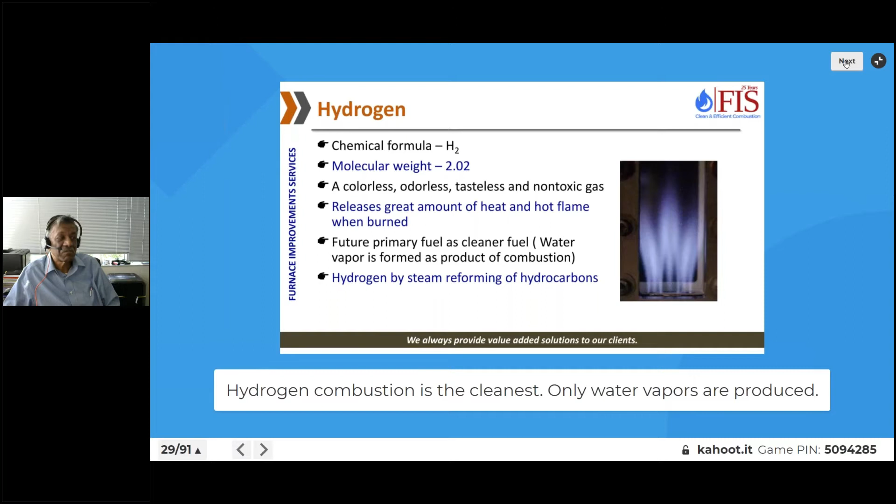Hydrogen is very light. Molecular weight is only 2. Colorless, odorless, tasteless, non-toxic gas. I think it's a very, very fun fuel. Releases great amount of heat, hot flames, future fuel. The only product of combustion is water vapor, and steam reforming is one of the major ways in which we are generating hydrogen. So very, very important.

And here I can show you how the hydrogen demand has gone up in the last 40 years. We are almost at 4 times. Every 10 years, the demand is doubling, actually, you can see. And there are 2 major users. We have ammonia and we have refining. If you see the chart, you will see basically the 2 major users. Others are very, very minor.

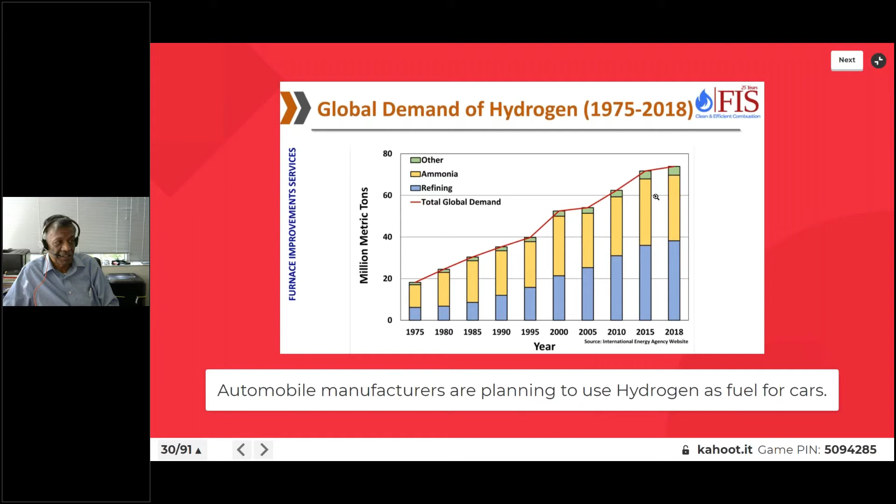So let us talk about the furnaces now, or the SMR, steam methane reformer. We have been talking about end products, and the purpose of steam reforming is to convert hydrocarbon feed into hydrogen-rich synthesis gas. It's carried out in a direct fired catalytic reactor in the presence of steam. So we need to understand what process is taking place. So we will talk about the chemistry of steam methane reforming, catalyst, steam to carbon ratio, operating conditions, and design parameters.

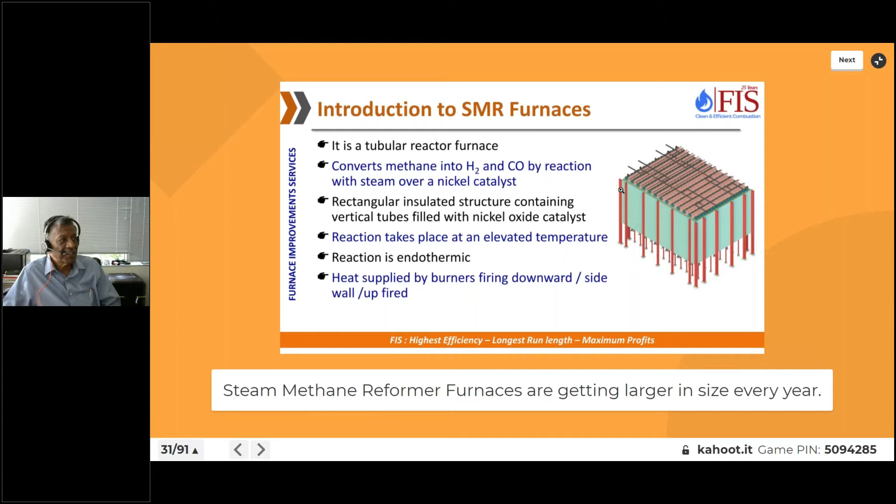So in most of the furnaces, we are heating. We are just doing sensible heating, or we are doing vaporization. But this is a reaction furnace. What goes in doesn't come out. So we are feeding steam and we are feeding methane, but what comes out is hydrogen, carbon monoxide, carbon dioxide, and unreacted methane. This reaction is endothermic. It takes place at high temperatures, and the heat is provided by burners firing downward, sidewall, or upward, depending on the design. So this is basically the steam methane reforming furnace.

So typical flow is we take the hydrocarbon feed, preheat it in the convection section, then we do the purification. We'll talk about it, but we need to purify and remove all the sulfur, almost down to 0.2 parts per billion, because sulfur is a poison for the nickel catalyst. So we remove this, then we mix steam, again preheat it, and then send it into these tubular reactors, where we are providing heat for the endothermic reaction.

And then, of course, we generate steam at the outlet to recover the heat. That's basically the typical flow scheme. And the flue gases are cooled down and then vented to the stack. It appears that in future we may not be able to even vent it to the stack. We may be recovering CO2 from these flue gases and sending only the rest, oxygen, nitrogen, and water vapors, into the stack. And the CO2 will be sent to the pipeline. So that is the future of flue gases as I see it in the next 15, 20 years.

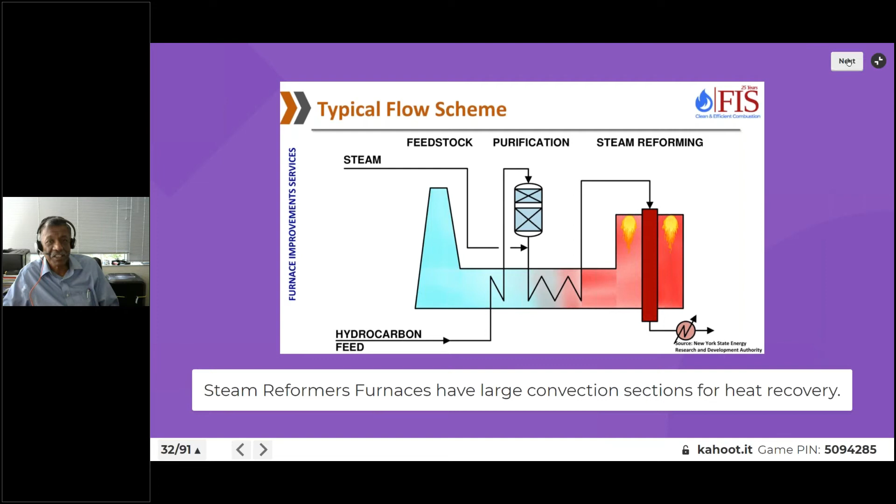So one of the parameters we want to talk about is what is steam to carbon ratio? What does it define? Is it weight of steam to weight of carbon, weight of steam to weight of hydrocarbon, moles of steam to moles of hydrocarbon, or moles of steam to moles of carbon? So most of you got it right, actually. Steam to carbon ratio is defined as moles of steam to moles of carbon in the feed. That's basically what steam to carbon ratio means.

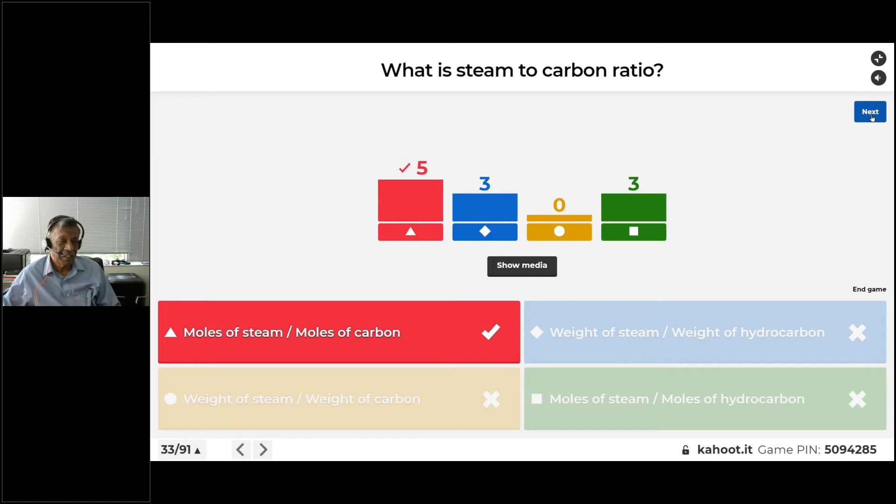And let's go over and ask you a couple more questions. So we have a reaction given over here, which is methane plus water produces carbon monoxide and 3 molecules of hydrogen, CH4 + H2O → CO + 3H2. It's an endothermic reaction requiring almost 97,000 BTUs per pound mole. So I'm asking you, what is the steam to carbon mole ratio in the reaction we just talked about?

So almost everybody got it correct. It is 1. So if you look at the equation, we have 1 mole of methane, and that 1 mole of methane has only 1 mole of carbon, and then 1 mole of water, which is 1 mole of steam. So the ratio is 1:1. So if you think about this reaction, the basic reaction which is taking place, theoretically, the steam to carbon ratio needed is only 1.

But what happens is there is another reaction which is taking place, which is called the water gas shift reaction. And if we combine that reaction, we get 1 methane plus 2 water molecules going to carbon dioxide plus hydrogen. So we are generating more hydrogen because of the water gas shift reaction. So now here,

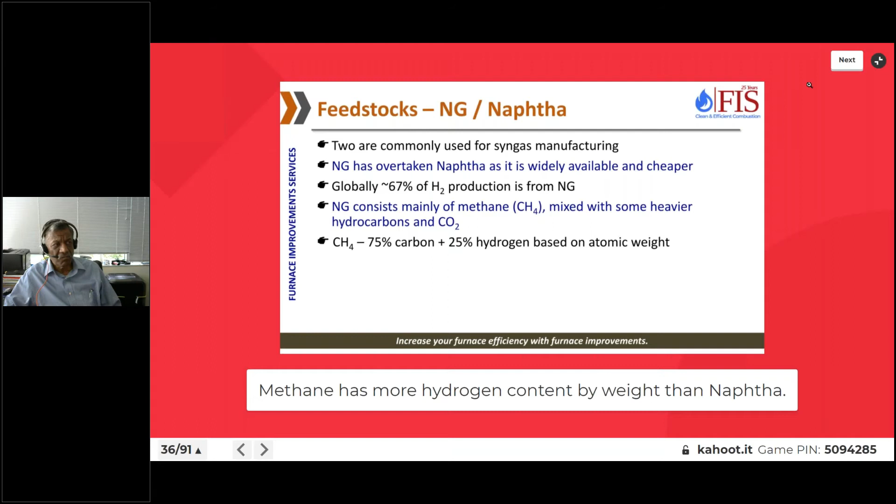And as we talked about, even methane has only 25% hydrogen. Methane actually has more hydrogen content by weight than naphtha. So in a way, it is even better than naphtha. Naphtha has much less hydrogen as compared to methane.

So we already talked about the first reaction, which was reforming of natural gas, and there we are producing hydrogen. Then another reaction which is taking place is this CO, which is being generated, reacting with more water vapor to generate more CO2 and more hydrogen. Now this is an exothermic reaction. If we add the two reactions, we get methane plus 2 water vapor going to CO2 plus 4H2.

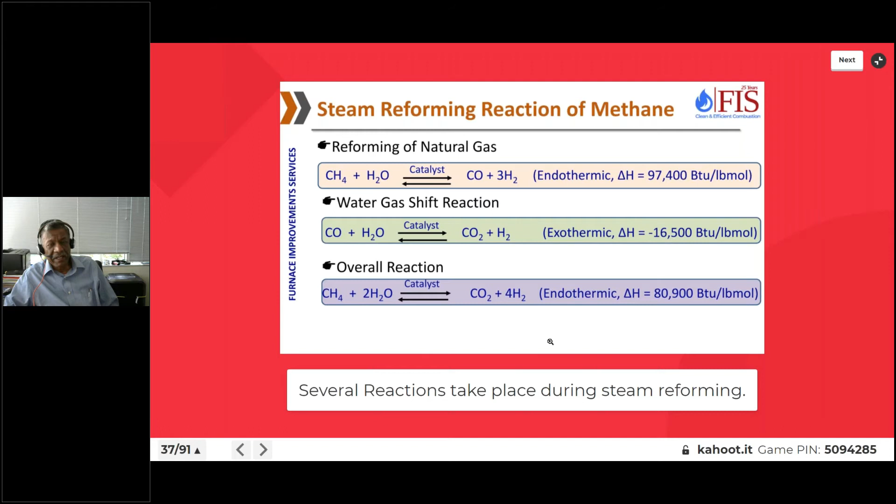So we get more hydrogen, and our aim is to get as much hydrogen as possible. So we get these two reactions and we are generating 4 molecules of hydrogen using water vapor. So that is the net reaction which is taking place. So this is what we call the water gas shift reaction. And they both combine to give you more hydrogen.

So typically, what comes out of steam reforming is the gas, which is a mixture of hydrogen. If you see, predominantly we get about 47% hydrogen. Then we get carbon monoxide, carbon dioxide, methane, water, and some nitrogen. So that's basically the output of steam reformers. And if you compare this with different uses, you will see some very good similarity.

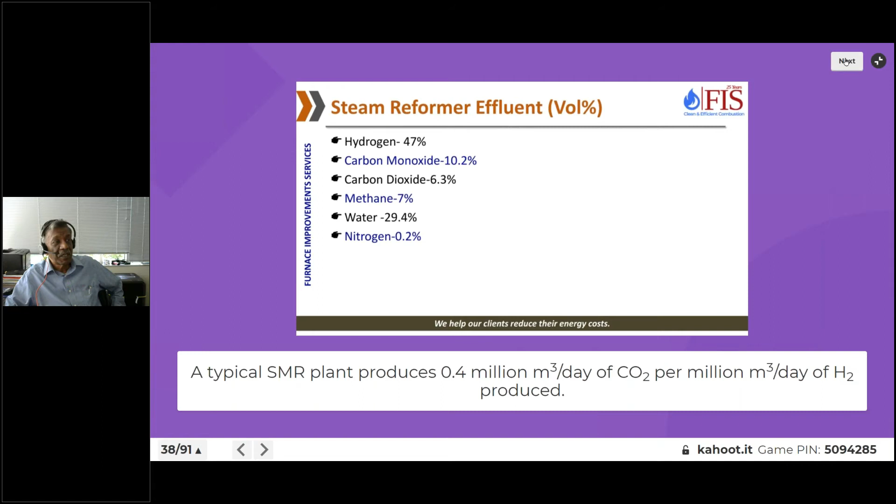Typically, in ammonia, we leave the methane at 8 to 12% because we want to combust this methane to generate carbon dioxide and also get nitrogen. So we do a secondary reforming process and we also generate more hydrogen. So during the secondary reforming, we need this methane. As a result, the outlet temperature of the ammonia reformer is lower as compared to hydrogen and methanol. Hydrogen and methanol reformers are operated at higher temperatures.

Things may change because they are bringing in different technologies like PSA and air liquefaction. So then the source of nitrogen may change. But this is basically the minor difference over here. We get less CO in ammonia and more CO in methanol and hydrogen.

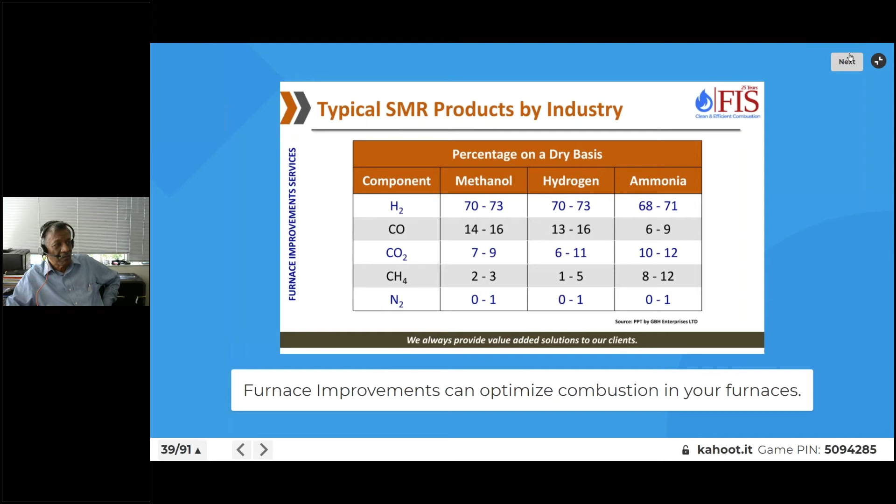So that's 25% of the heat we are supplying going into just sensible heat. And you can see that these are the two molecules, methane and water, and then we get hydrogen and CO2. That's what we are getting.

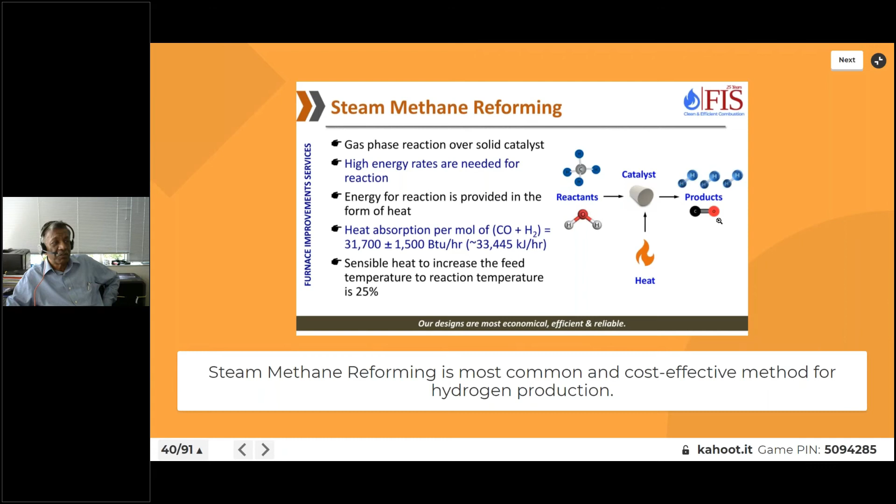And the reason for that is the feed is at ambient temperatures. If you look at the natural gas or methane, it is at ambient temperature. And if you see, the products leave the reformer at about 1400, 1500, 1600 degrees F, but then they have to be cooled so that they can be processed further. We cannot use that 1600 gas anywhere in the CO, methanol, or hydrogen. We need them at the lower temperature.

So the high temperature products have to give out heat, and that leads to a lot of steam production. So it is not a matter of choice, but a matter of necessity, because we are going to take the feed and heat it up all the way to 1500 so that the reaction can take place. And then again, we have to cool it down. And also we have to cool down the flue gases so we generate more steam. One from the product, one from the flue gases.

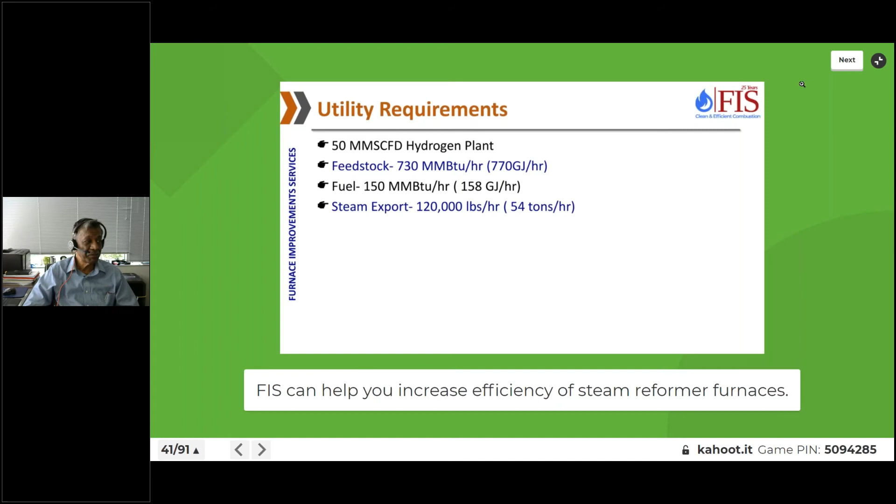So almost 120,000 pounds per hour or 54 tons of steam is generated in a 50 million standard cubic foot per day hydrogen plant. I don't have the number in metric, but maybe next time we can put this number in metric also.

So let's talk about how we are designing reformers, or what are the parameters which are responsible for converting the methane into hydrogen. And we talk about three parameters here. We talk about temperature, we talk about pressure, and we talk about steam to carbon ratio. So three parameters we want to talk about.

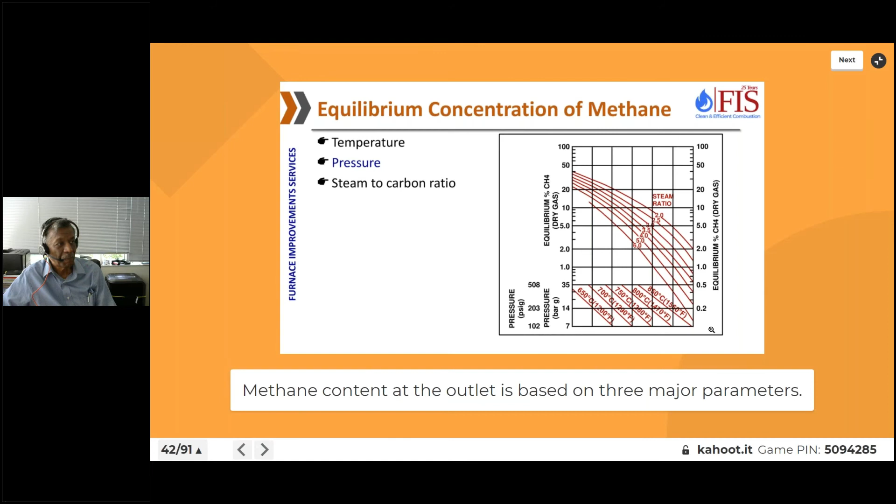So we talk about theoretical product, theoretical concentration, and we're talking of actual concentration, and between the two, we call it approach to equilibrium. And that means, let's say we get 1500 degrees for getting 5% methane, as we just saw in the chart.

But in reality, you will see that temperature has to be 10 to 15 degrees higher at the start of run. At the end of run, it could be even 35 to 50 degrees higher. So that difference in temperature is basically the approach to equilibrium. And that happens because the catalyst keeps on getting deactivated over time.

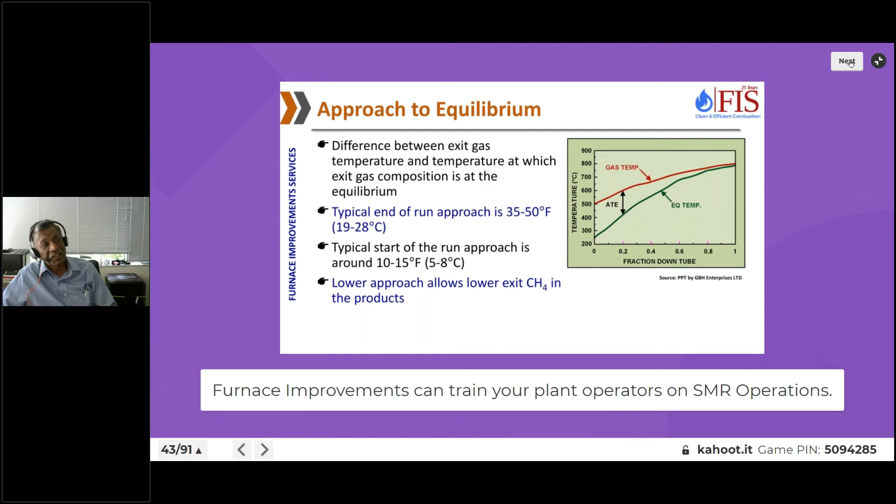So basically, a lower approach will get you lower exit methane in the product. So in the new plants, your temperature will be lower, and as the catalyst ages, your temperature will keep on going up. So methane slip: at the start of run, we will be very close to equilibrium conditions, but as the catalyst starts aging, the methane concentration will go up, or we will have to raise the temperature.

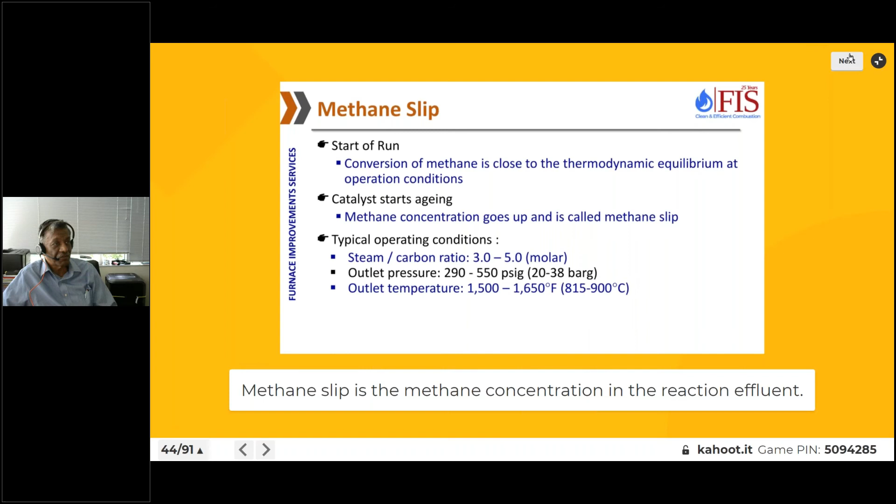Typical operating conditions: steam to carbon ratio of 3 to 5, outlet pressure of 290 to 550, and outlet temperature of 1500 to 1650 degrees. That's typically the operating conditions we have for steam reforming. So if we go for a higher outlet temperature, what will happen to the methane content?

Will it go up? Will it go down? Will it not have any effect? So only 2 of 10 people got it right. As the temperature goes up, the methane content will keep on going down. Remember, this is an endothermic reaction. Endothermic reaction means it needs heat. So the more you heat, more reaction will take place. So the methane content will go down. Higher temperature.

Okay. So higher temperature will always help our methane conversion, but we have a limit. We have a limit on the temperature, and we'll come to that. But let's talk about more things. If we increase the outlet temperature by 50 degrees, from 1400 to 1450, methane content will drop from 10% to 7.5%. So we have more conversion taking place.

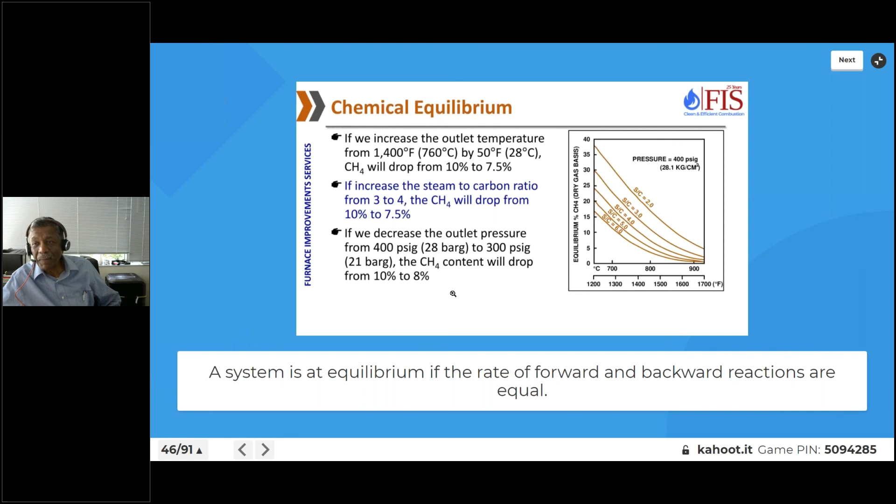The simple chemistry is if it's an endothermic reaction, higher temperature helps. If you looked at the equation, 1 CH4 plus H2O gives us 3 molecules of hydrogen plus CO. So 2 molecules go to 4 molecules. That means the volume is increasing. So in any reaction, if the volume goes up, lower pressure will help. So if you decrease the pressure at the outlet, it will help. However, it is not commercially viable to work at a lower pressure, and that's why we still continue using higher pressure.

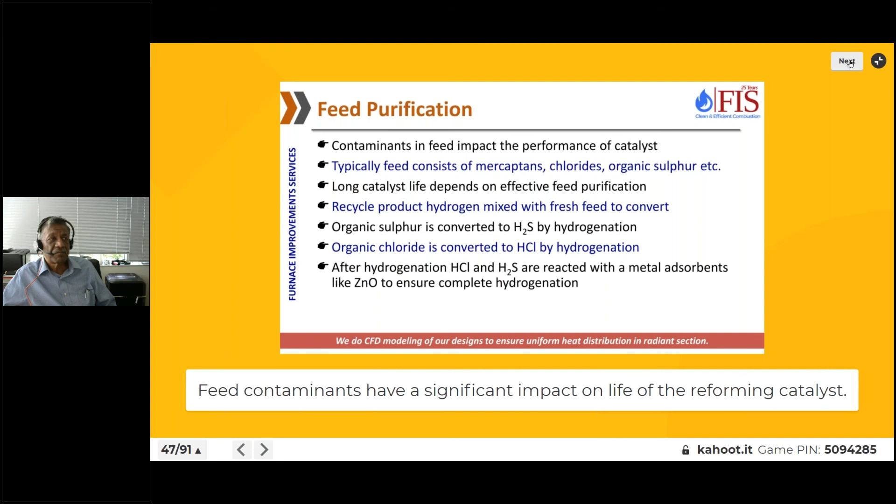Feed purification: we have to have the feed really, really purified. We are going to go down to 0.2 ppm on sulfur, 0.2 ppm on chlorine, heavy metals less than 0.1. So we have a zinc oxide bed, and we try to take that sulfur out from our natural gas or from naphtha. And these are the reactions which are taking place.

Hydrogen reacts with the mercaptan compounds, converts them into H2S, and that H2S is absorbed in the zinc oxide bed. So it's a very established technology used for removing sulfur. So sulfur has to be removed. If the sulfur goes to the catalyst, your catalyst will get deactivated. So we have to make sure that the poisons, of which sulfur is one, do not go to the catalyst.

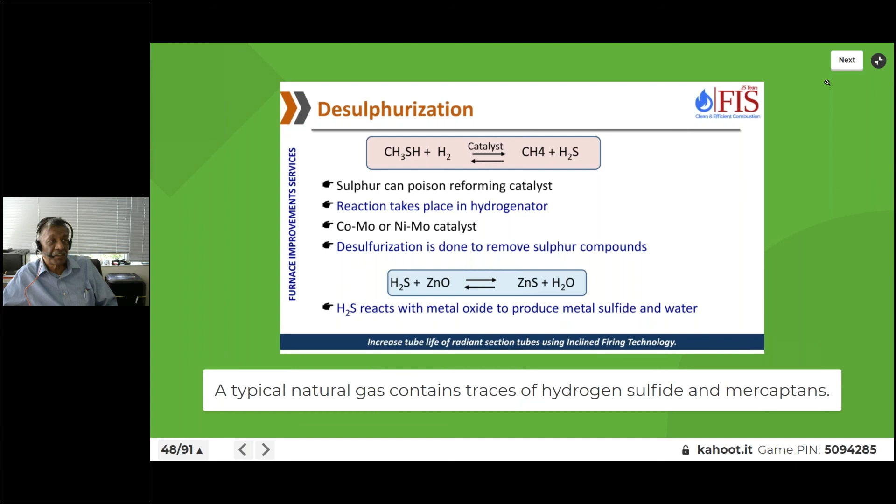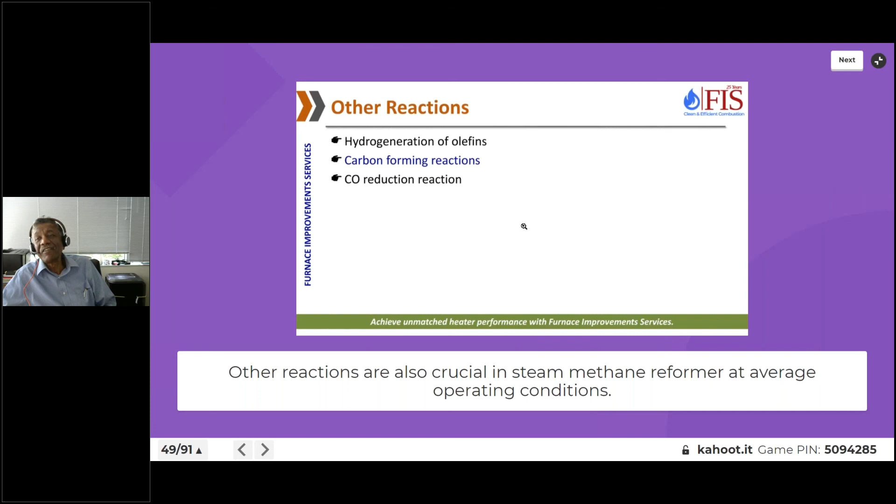There are some other reactions taking place. Let's just go over them quickly. One is the hydrogenation of olefins. The important one is carbon forming reactions or CO reduction reactions, because another problem with the catalyst is carbon. If you have carbon deposited on the catalyst, your catalyst is gone. Catalysis is a surface phenomenon. If your surface is clean, that's where the catalyst is active. If you cover the catalyst with soot, carbon, anything, the catalyst becomes deactivated. So it's very simple.

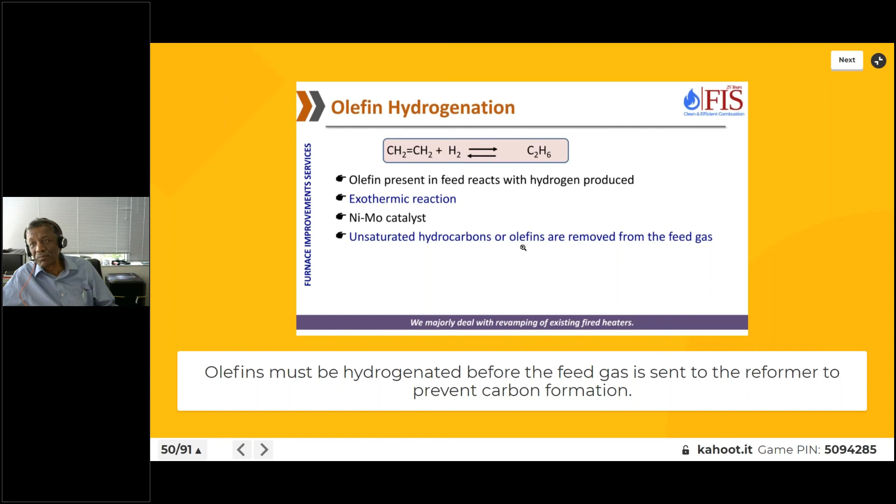So if you have got any olefins in the feed, they will combine with hydrogen to make ethane. You don't want this to happen. So you want to make sure that olefins are removed from the feed gas even before you process it. You don't want to be consuming hydrogen. Similarly, carbon forming reactions are very important. There are two reactions we are talking of: methane cracking into carbon and hydrogen. We don't want this to be happening at all.

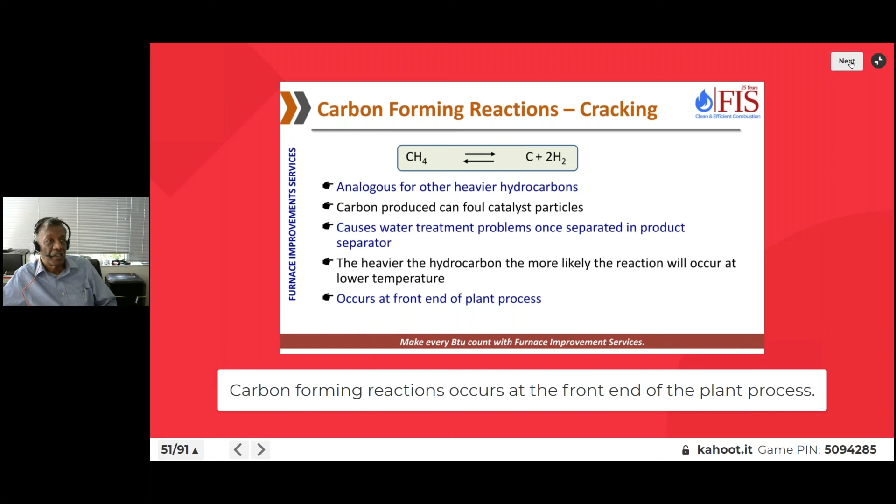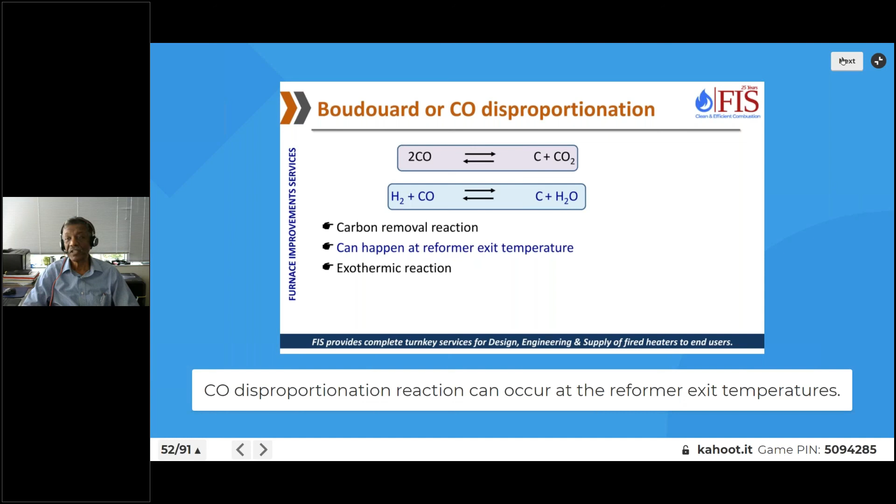The second reaction is the Boudouard reaction, or CO disproportionation. Basically, it happens at high temperatures, and here you can see CO is converting into carbon and carbon dioxide, and carbon monoxide also reacts with hydrogen to form carbon and H2O. So you don't want these two reactions taking place. If you have carbon formation, you will get problems. So we have to make sure that these two reactions don't take place at all.

So let's talk about the function of the catalyst. Why do we even use a catalyst? We could have combined methane and steam, but to combine them we would need very high temperatures, or very different conditions. So what the catalyst does is alter the reaction rate. Catalysts do not take part in the reaction. They don't get consumed. They basically lower the activation energy of the reactants.

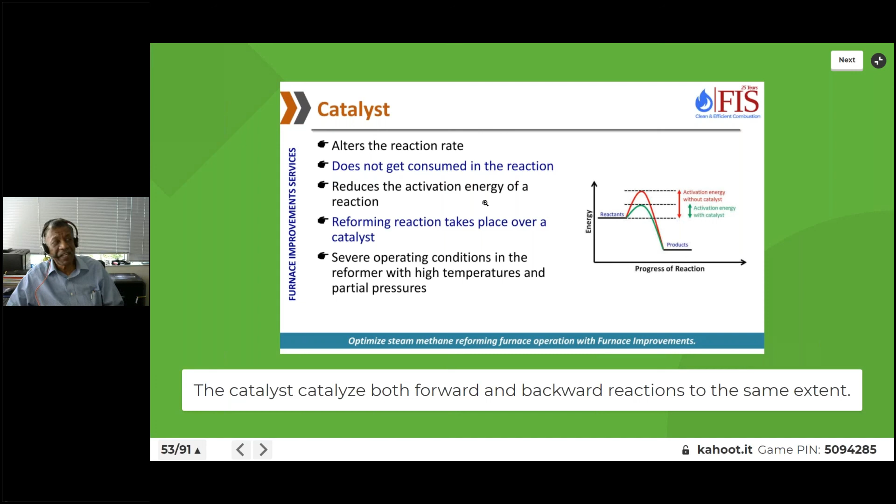So if you see in this chart, we have reactants here, and without catalyst the activation energy would be much higher. But with catalyst, we lower the activation energy, and that is why we get conversion. Okay, so without catalyst, we would have to go to extreme conditions, and the conversion may be very low.